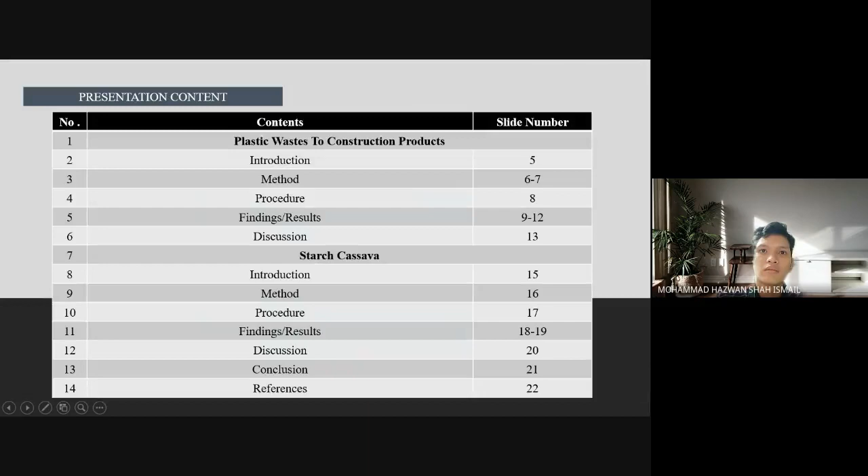Plastic waste to construction product. Sustainable concrete is defined as concrete that uses less energy in its production and produces less carbon dioxide than normal concrete. It is also known as green concrete or eco-friendly concrete.

There are human actions that create trash such as product manufacture and used material. Plastic waste is one of the solid wastes produced in large numbers and causes a considerable risk to our planet's sustainability. When plastic debris reaches the water, it causes damage to the environment, economy, and aesthetics, according to reports. Finding efficient alternative methods to recycle this plastic waste would therefore go a long way towards ensuring a sustainable ecosystem. Recycling plastic waste protects the environment and contributes positively to the material by allowing it to be used in a variety of applications such as construction.

Because construction is the largest industry in various economies and the largest consumer of raw materials, it is a potential area where plastic waste may be beneficially exploited for multiple uses. Plastic waste can be used as aggregate in cementitious and asphalt mixes, filler, and insulation in civil construction.

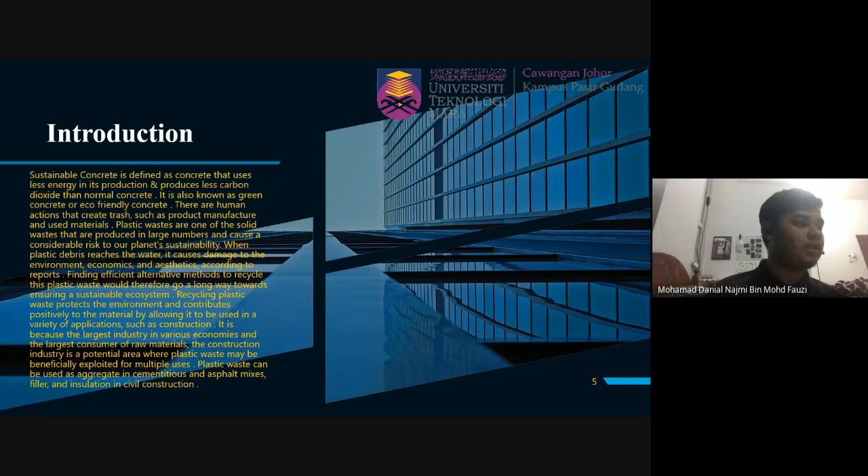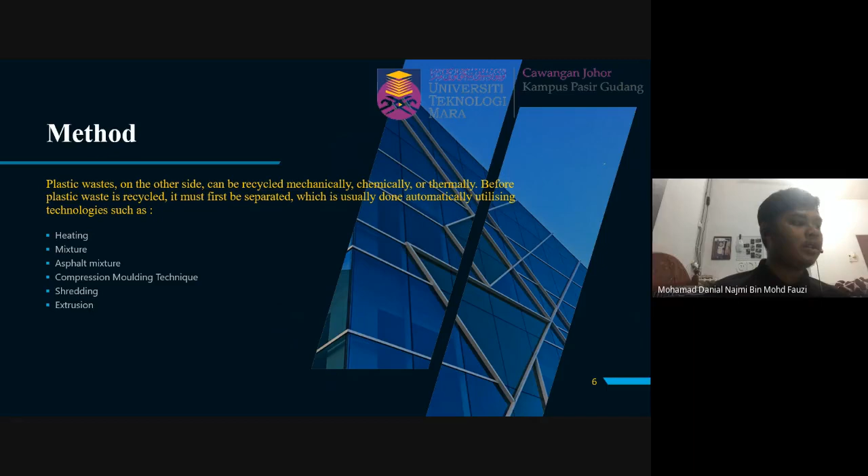Method: plastic waste can be recycled mechanically, chemically, or thermally. Before plastic waste is recycled, it must first be separated, which is usually done automatically utilizing technologies such as heating, mixture, asphalt mixture, compression molding technique, shredding, and extrusion.

First, what's the meaning of heating in this process? Heating is a thermal recycling of waste materials, involving heating the plastic waste at high temperatures, then pouring it into a mold to create new items.

Next, mixture. The capacity to include diverse components into cementitious composite during the mixing process has opened the way for the incorporation of various materials into it. As a binder and aggregate, a variety of waste materials have been added into the cementitious composite.

Third, asphalt mixture. Plastic waste can be integrated into asphalt mixtures in the same way that it is used as aggregate in cementitious composite.

Next, compression molding technique. Compression molding technique is used to produce composite components in high production volumes such as automotive components, to make a plastic mixture.

Shredding is a process to cut plastic into smaller pieces for granulation. Lastly is extrusion. Extrusion is when plastic is melted and formed into a continuous profile.

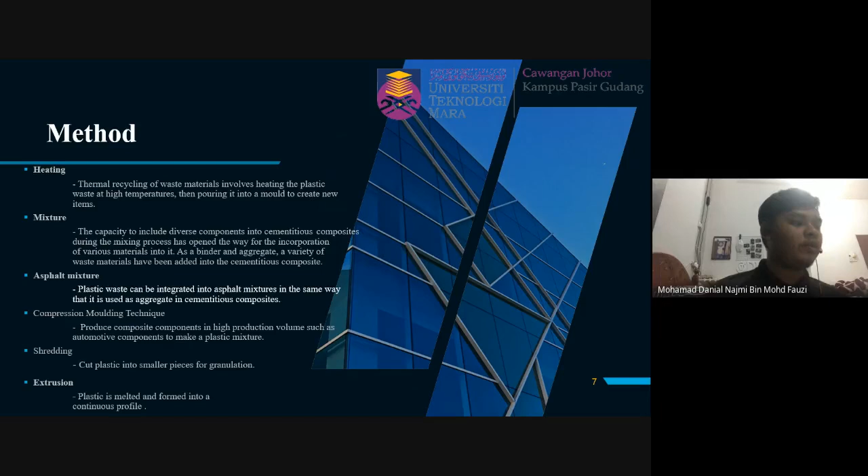This is the procedure to complete the process to make a plastic brick. First is plastic shredding. Plastic shredding, as we know, cuts the plastic components into small pieces. Then, the second step is the plastic shredding product will combine with sand.

The third step is the sand and the plastic shredded will be mixed together. Fourth, the produced mixture of sand and plastic will be heated at 100 to 200 Celsius.

The fifth step is the mixture of sand and plastic will be weighed and they will be compressed and shaped according to the weight setting.

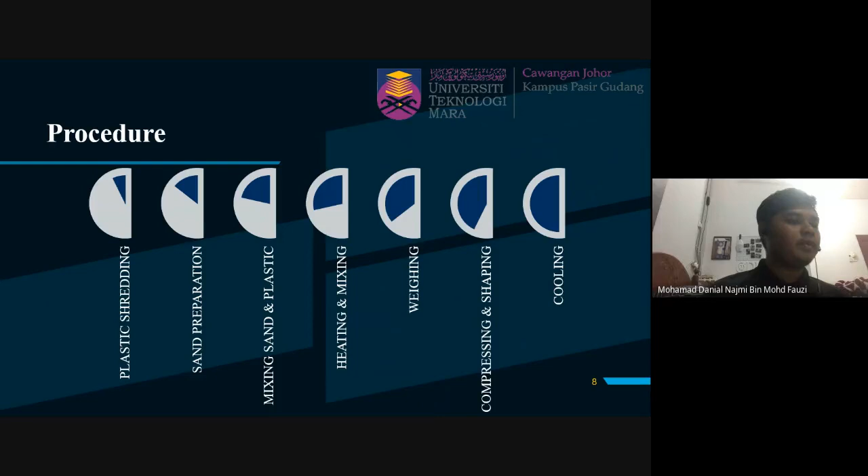Lastly, the complete plastic brick will be cooled in water.

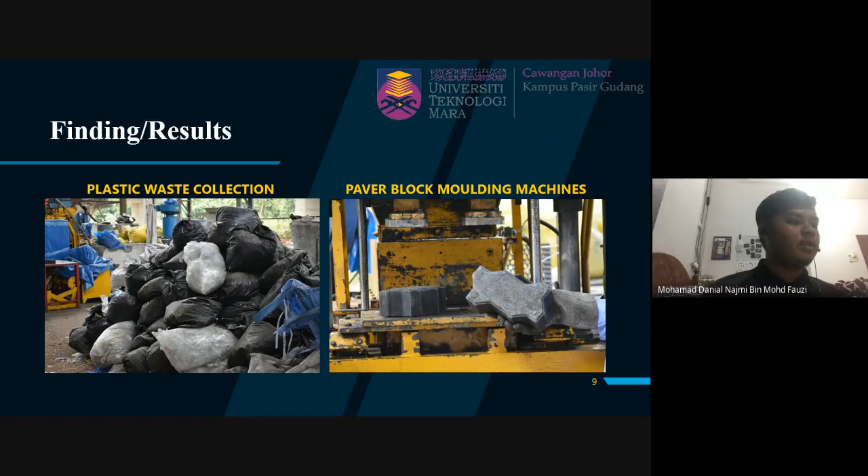This is the finding and result. We can see the first picture showing a plastic waste collection, where we can see many plastic wastes that exist in the world. Next, the picture shows heating and mixing.

Heating and mixing is part of the process to make a plastic brick, and we can see in the right picture the compression molding technique used to compress and shape the mixture of sand and plastic.

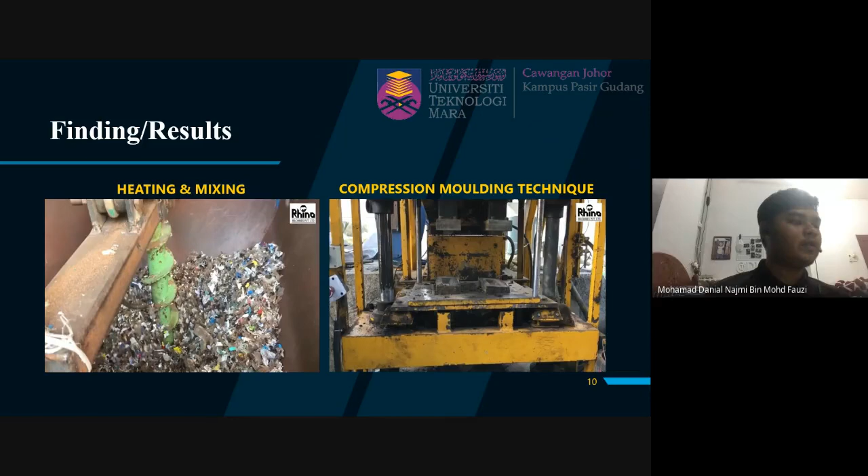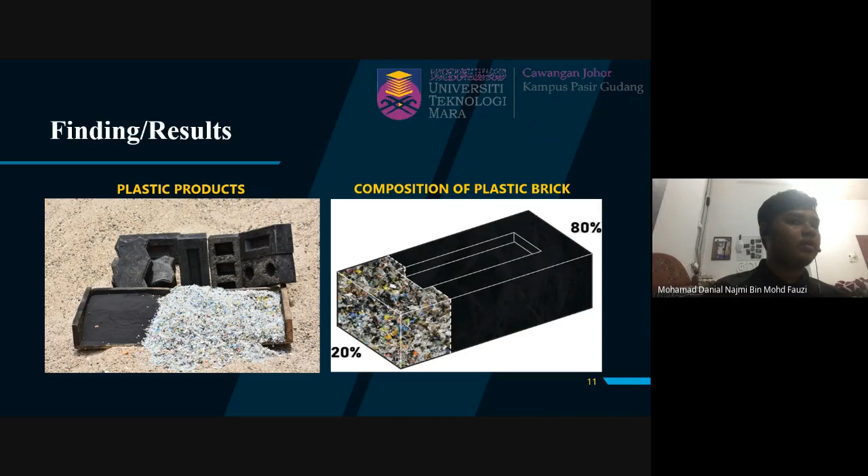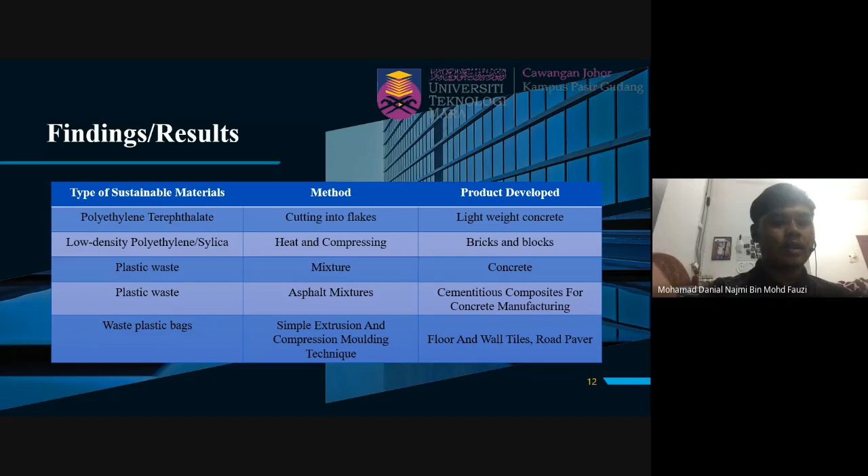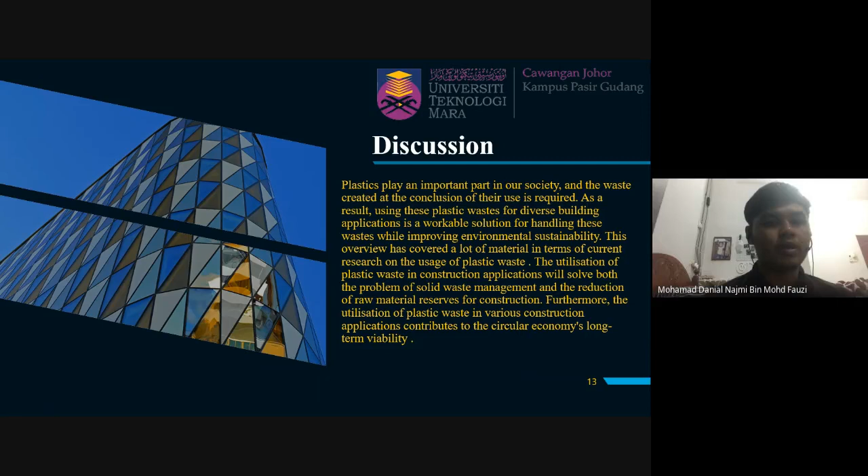As a result, using this plastic waste for diverse building applications is a workable solution for handling this waste while improving environmental sustainability. This overview has covered a lot of material in terms of current research on the usage of plastic waste. The utilization of plastic waste in construction applications will solve both the problem of solid waste management and the reduction of raw material reserves for construction. Furthermore, the utilization of plastic waste in various construction applications contributes to the circular economy's long-term viability.

Next, we move to the starch cassava as additive brick.

Introduction. Brick is one of the building materials used to construct a building. Brick has also evolved from its start of use until now. In terms of material, brick can be divided into two types: burnt and unburnt bricks. Each of these bricks have their pros and cons in terms of quality, strength, and cost.

In some research by the Department of Building, Federal University of Technology, Minna, Nigeria, and the Department of Architecture, Universitas Bandar Lampung, Indonesia, they found that the burnt brick properties can be improved, such as moisture absorption, abrasion resistance, and compressive strength, by using cassava starch as an additive in making bricks. To overcome the waste of starch cassava that is usually thrown out or burned, the researchers use it as the additive to make bricks.

In other research, the cassava liquid waste contributes to environmental pollution. So the problem of environmental pollution can be solved and the making of bricks will evolve at the same time.

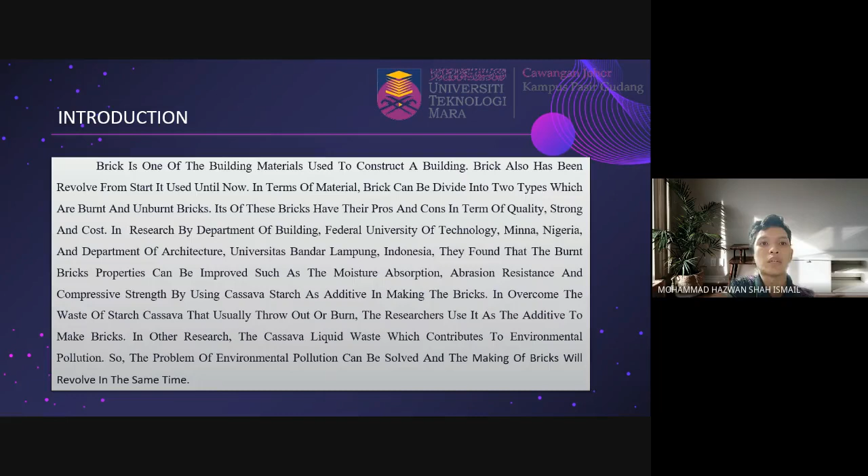Method. Materials used to make the brick are cassava, cement, sand, and charcoal.

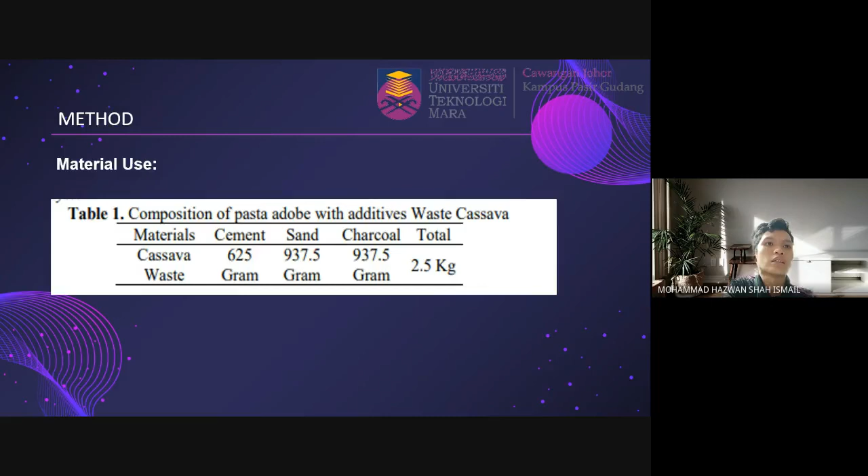Procedure. First, a mold was used with dimensions: length 23 centimeters, width 11 centimeters, and height 5 centimeters. The waste starch cassava was dried under the sunlight. Next, all the material in dry condition were mixed with water, about 13% of the total weight of material, as a binder. After that, the mixed material was stored not in direct contact with sunlight.

The mixed material was checked by forming a circle for less than 120 minutes to make sure the mixed material is stable and no crack forms. The mixture was put into the mold and dried. Then, the finished bricks were stored in water to maintain the moisture. Lastly, the bricks at 21 days of age were examined by hammer test.

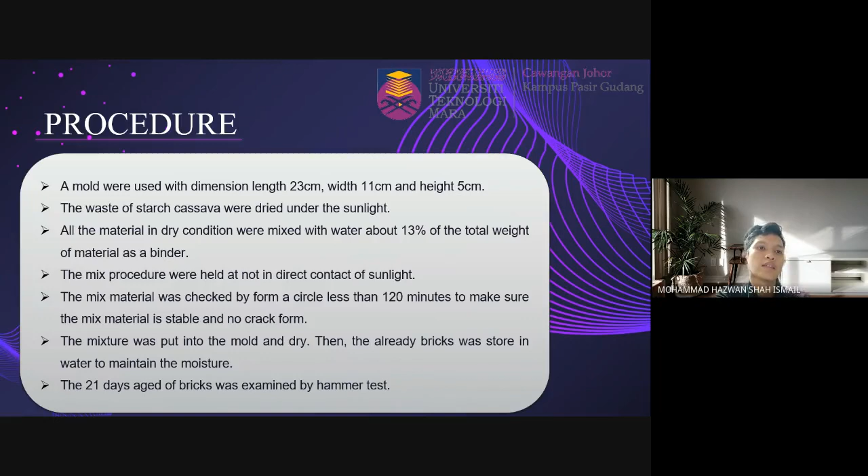Result: the cement used for the brick is 625 grams. The sand is about 937.5 grams, and charcoal about 937.5 grams. The total of all the materials is 2.5 kilograms.

The result by means of the hammer test: Sample 1, the bricks got 14.5 Newton per centimeter square. For sample 2, 12.5 Newton per centimeter square. And for sample 3, 11.5 Newton per centimeter square. The average of all the sample hammer tests is 12.8 Newton per centimeter square.

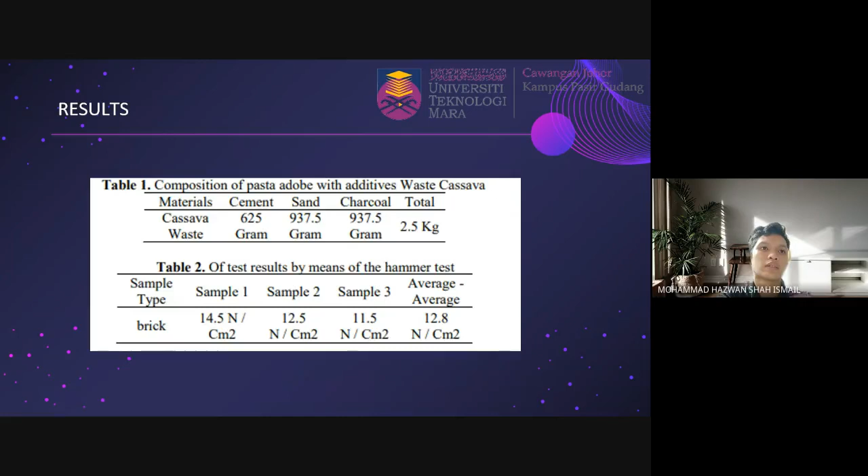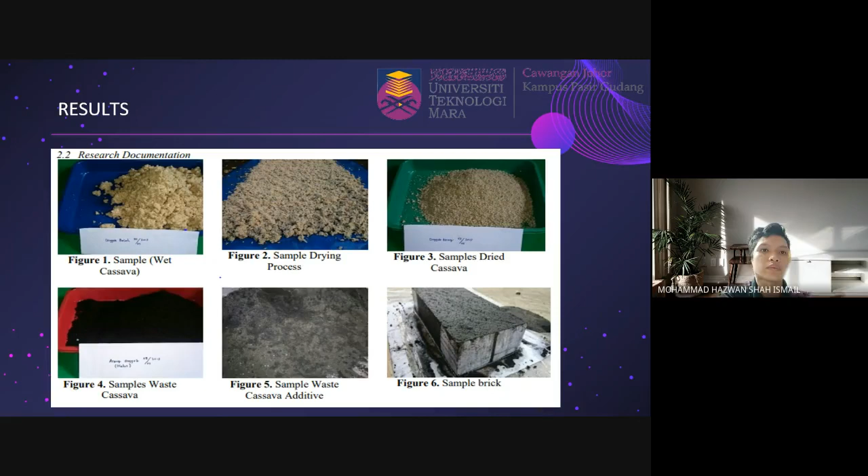Figure 5 shows the sample of waste cassava additive mixed in to make the bricks. And lastly, figure 6 shows the sample of brick in the mold. Discussion.

The bricks with additive waste starch cassava are more dense because the aggregate of waste cassava is smooth. This factor helps in the binding process and compacts the material perfectly. The color occurs blackish gray because of the cassava charcoal. The result of 3 samples' hammer test on average is 12 Newton per centimeter square.

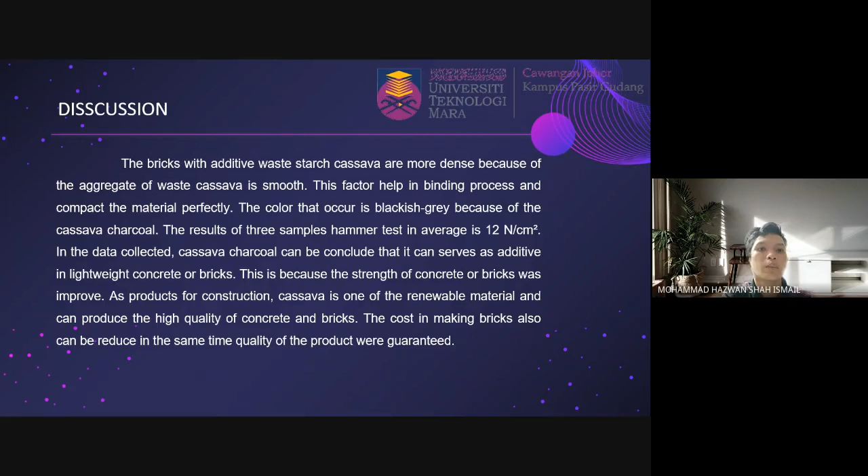From the data collected, it can be concluded that cassava charcoal can serve as an additive in lightweight concrete or bricks, because the strength of the concrete or bricks was improved. As a product for construction, cassava is one of the renewable materials and can produce high quality concrete and bricks. The cost of making bricks can also be reduced while the quality of the product is maintained.

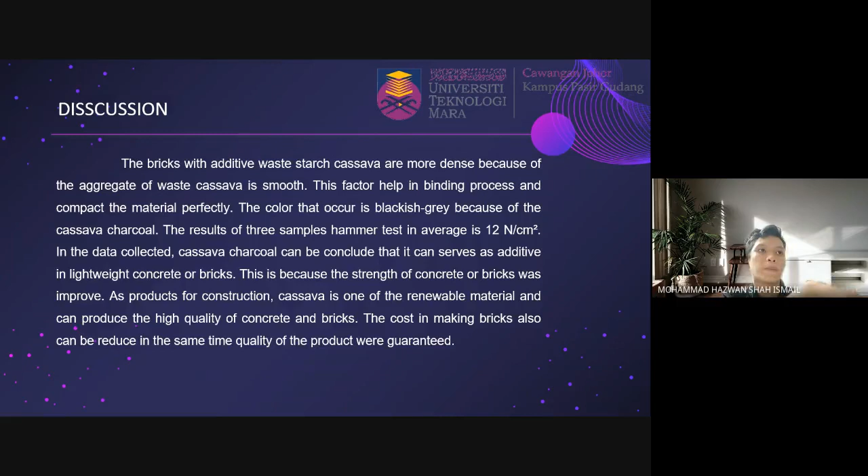Conclusion for the plastic and starch cassava comparison: in conclusion, a better future sustainable concrete or brick material is plastic compared to starch cassava. There are several factors that cause plastic to be chosen as a better sustainable material than starch cassava. The first is that plastic is easier to find. This can be proven by the fact that human daily use items are mostly made of plastic compared to starch cassava.

The next factor for selecting plastic as a future sustainable material is that at the same time it can reduce plastic waste in the world. Next, starch cassava was not selected because the resource to obtain it is scarce and difficult to obtain in large quantities. Lastly, starch cassava is easily decomposed if left for a long time, so it can be clearly stated that it is dangerous to be used as a brick in a construction project.

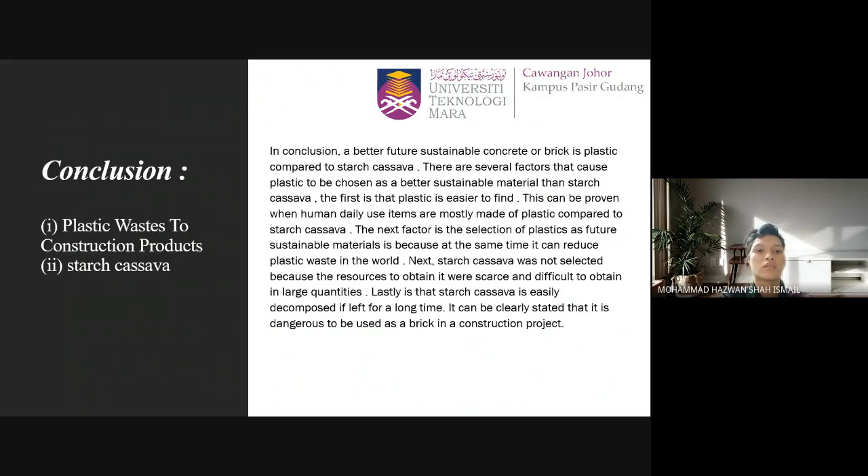Reference: plastic waste to construction products, and starch cassava.